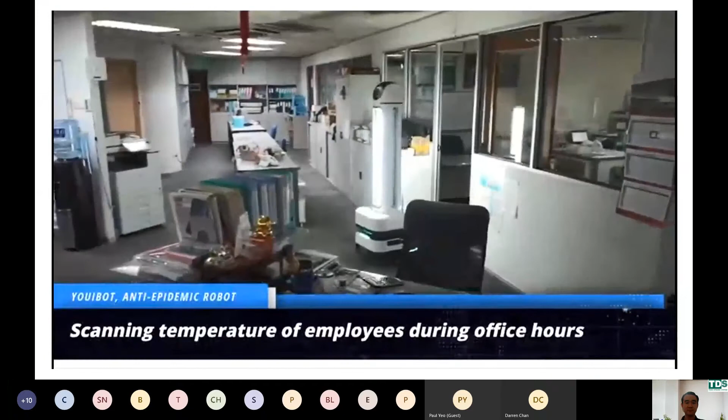Scanning temperature of employees during office hours. With 6 UV lamps and a UV power of 180 watts, Youibot does a 360 degree omnidirectional irradiation. Using shortwave UVC, Youibot is capable of destroying viruses, DNA and RNA in just minutes.

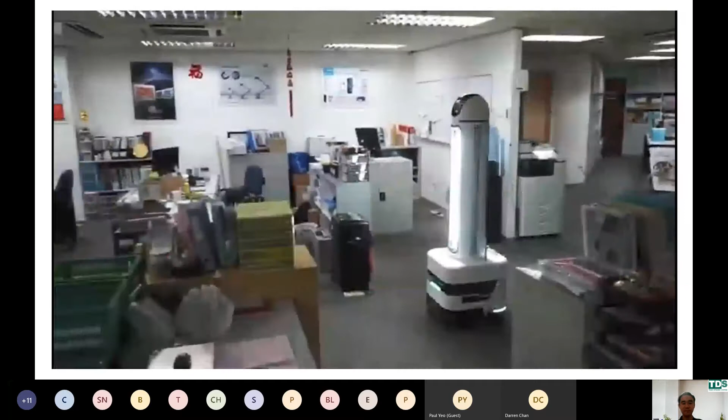Contact us for more information.

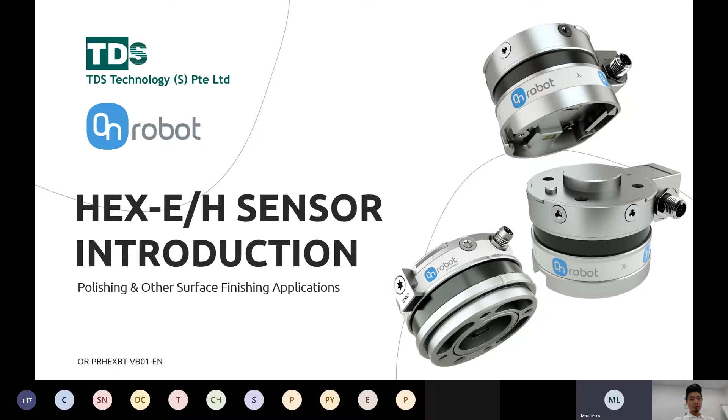So we will talk a little bit on our product, which is called the Hex E or the H. We have two versions of it, Hex E and H sensor. So what is the presentation content that we will cover today? I'll just talk one pager on OnRobot's vision, and after that, I'll go into understanding of the Hex force-torque sensor.

So as you've seen, this is a six-axis force-torque sensor, so it's called the Hex. I'll share some application videos as well, and I'll share with you a success story using our Hex sensor. And after that, we'll go for some Q&As, and after that, I will show a live demo on how easy it is to program the force-torque sensor on a UR robot, because I have a UR robot with me now. So okay, let's get started.

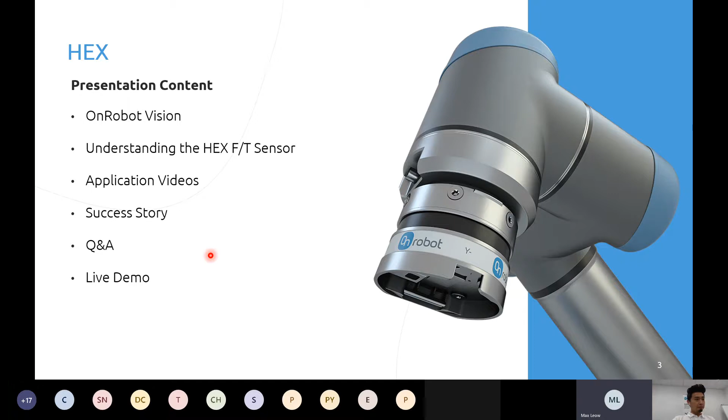So OnRobot vision. So what is OnRobot's vision about? It's all about building a one-stop shop for enabling collaborative applications. So we want to have an extensive range of products that actually cover all robots, all applications, all accessory types, and of course all industries.

So OnRobot will enable you to actually build a highly versatile robotic system. So OnRobot's vision, the main focus, is actually to be a one-stop shop for all of our customers out in the market.

So I'll move down towards the product itself, just to give you a short, brief introduction of the Hex sensor. Okay, so as you can see over here, we have actually two versions of the Hex sensors. The older version is called the Hex E or the H.

So we have two models for each version. And the newer version is actually called the Hex E and H QC. So what are the differences between the two? Specs wise is actually 100% the same. As you can see, the most obvious difference is actually the hardware.

So as you can see at the bottom, the Hex EH, the older version, is actually the original design which we have. It is lighter and shorter than the Hex QC version. So we have available robot kits as well, and it works together with a compute box - it's some sort like the brains of this particular sensor. And for the QC version, we call the QC actually stands for quick changer.

So we actually have an inbuilt quick changer at the bottom of the sensor, as you can see. So this is actually a manual quick changer, not an auto quick changer. So it can work together with any of our OnRobot grippers. For example, if you want to use a two-finger gripper, you can just click it on, and with just one cable connected to the compute box, you can actually start your programming. So it's really easy and quick to set up.

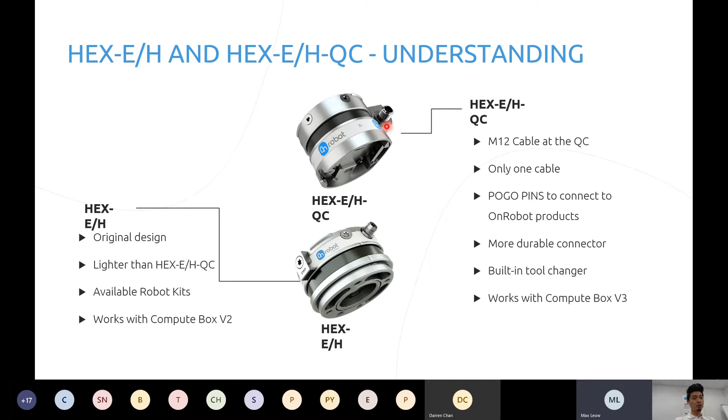So we also upgraded our connector size to be M12. It's bigger and more durable as well. Okay, so let's move on.

Okay, why do we need to use force-torque sensors? In layman terms, these few pictures will actually tell the whole story. I will not go too much in technical details, just a very brief layman explanation. As you can see on the picture on the left, for example, if I want to move this particular block, I want it to go into this hole. Can I do it without a force torque sensor? Yes, it's possible, but I have to teach the robot many positions to move it into this particular hole. But with a force torque sensor, I actually do not really need to program so many points to move it in.

All I need to do is actually set a constant force in whichever direction that I actually need. For this case, let's say we are talking about the Z direction, which is downwards. So the robot will actually make use of the force, which is controlled by the sensor itself. It will always press a consistent force downwards, and it will actually move towards the position we've set, and it will keep moving now until it senses, for example, a hole over here, and it will continue pressing this particular cube all the way down till it reaches the bottom. So the force torque sensor will always give a consistent force pushing it towards that direction that you actually set.

So in another example, as you can see at the bottom right corner here, we have a concave surface, for example. So as you can see, without a force torque sensor, if you want to move your own customized tool or something across this particular curve, and you want it to stick to it, it is not really easy. You actually need to create many robot waypoints so that it will actually follow the contour. But of course, with a force torque sensor, it's really easy, as you can just set a consistent force in a particular direction, and it will just follow the contour of it. So this is why a 6-axis force torque sensor is actually very good to use in the market.

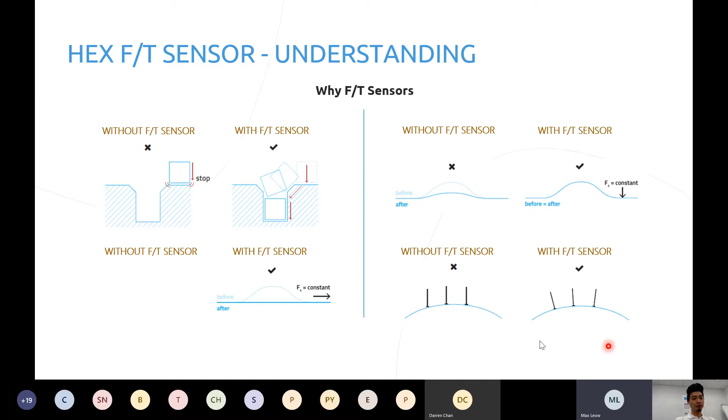The technology of the force torque sensors that we are using is actually optical. In the market, there are a few common kinds. We have the capacitive and we have the strain gauge. But for us at OnRobot, we are using optical. And if I'm not wrong, we are the only company using optical technology. So why optical? It's because it's more immune to EMF.

When you manipulate the sensor itself, the silicone will actually move when you use your hands or something else to manipulate the sensor. The light reflection will be different, and this in turn will send back a signal or some data to our compute box, and from there it will calculate and convert it into force and torque values. So this is actually the technology that we're using for force torque sensors.

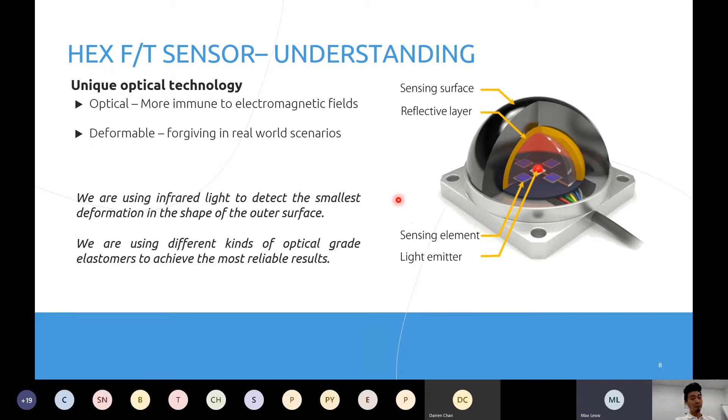So which force torque sensor to use? As I mentioned, we have 2 different models: the Hex E and the Hex H. Let's talk about the Hex E first. The Hex E is mostly used in assembly type applications, more for precise applications. It's always used when oscillation or payload is not an issue. So the Hex E is more precise and remains more accurate for a longer time than the Hex H.

Rule of thumb for your own tooling, if you want to use it: maximum payload of 3 kgs and 20 cm length. And for the Hex H, of course, it's the total opposite of the Hex E.

If you are using it on oscillating applications, for example turning tools, polishing, deburring, grinding, anything that can cause oscillation, it is better to use the Hex H. It's also good for heavier tools and fast movement. Why is it so? Because the Hex H silicon is actually harder than the Hex E.

So how do we categorize it? The E we call elastic, and the H we call hard. The Hex H can absorb more vibrations towards the sensor itself, that's why it's a harder silicon.

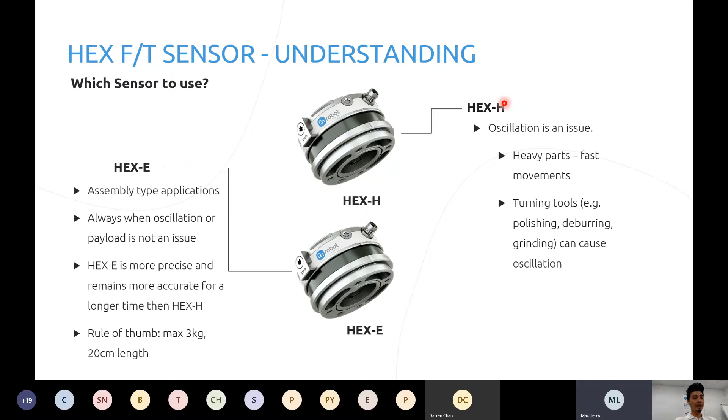So this is just some of the specs, the data of the hex sensor. I will not go into details, I'll just mention the key differences between the Hex E and the Hex H. For the nominal capacity, the forces for X, Y, and Z are up to 200 newtons. And for torque, XY is 10 Newton meters, and Z is 6.5 Newton meters, this is for the Hex E. For the Hex H, the forces are exactly the same compared to the E, but we have a higher torque value: XY is up to 20 Newton meters, and the Z axis is up to 13 Newton meters.

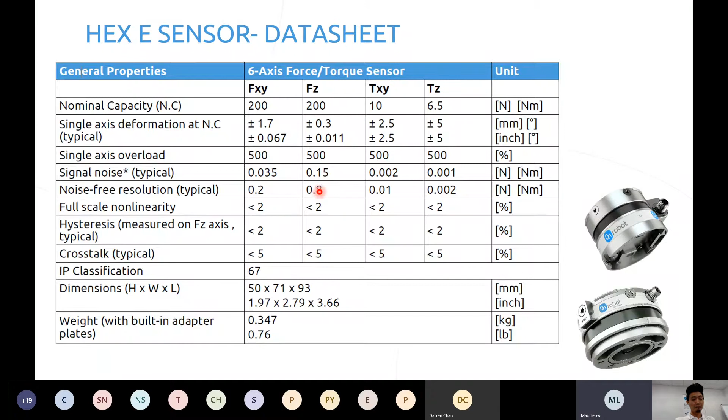Going back one slide, as I mentioned, the Hex E is more precise because the resolution is much smaller. For forces in X and Y it's 0.2, and for force Z it's 0.8. Compared to the Hex H, X and Y for force is 0.5, and Z is 1 Newton. So there's a slight difference in the specifications. If you're keen to know more, please feel free to approach TDS, or you can download the specs from our website.

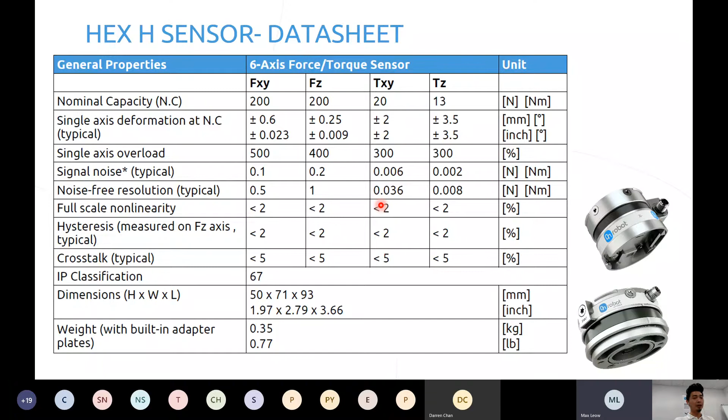So what kind of applications are good to use with this particular force torque sensor? Of course, like I mentioned, polishing, gluing, and welding. These are some of the applications that are possible to use.

Some of the benefits, of course, is really short programming time for complex paths. We have this path recording function. It is only to be used on UR and KUKA robots at this point of time. Later I'll show you what this path recording function is on the live demo itself.

Just a short explanation: I can actually use my hand to move the robot to whichever path I want it to go, and from there I can just play this path and the robot will follow that particular path which I have set it to.

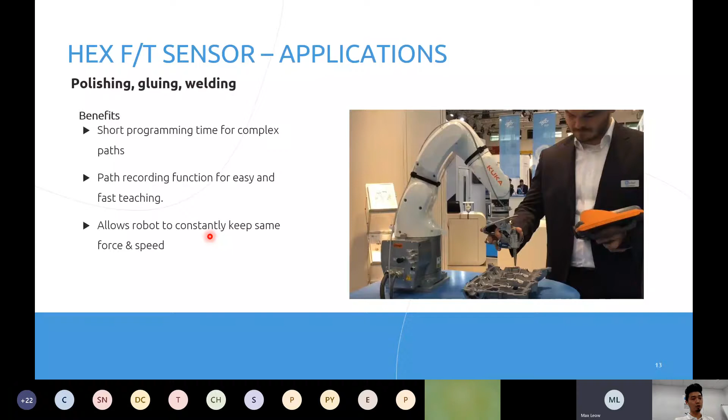The force torque sensor allows the robot to constantly keep a constant force and speed throughout your whole application. For deburring as well, you can make use of a force torque sensor. It reliably follows any kind of difficult contours, saving the time for all the complex programming needed. It allows the robot to constantly keep the same force and speed. That is what the force torque sensor is used for, along with short integration and easy programming, especially on the UR itself, because it's a collaborative robot.

And of course, for assembly, it is also possible. As you can see on the right side here, we combine our force torque sensor together with a 2-finger gripper to do an assembly in a PCB. We're actually inserting a ram into its position. We can set a pushing force, for example, so the insertion is automatically corrected. You don't have to teach the robot to push the ram into its slot and lock it in. The force sensor itself will actually do all the work for you.

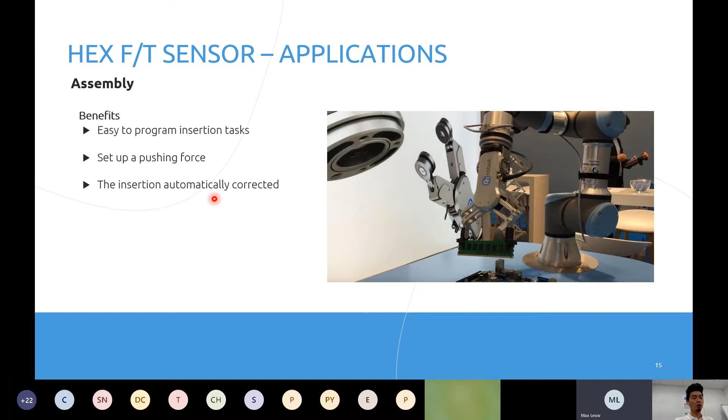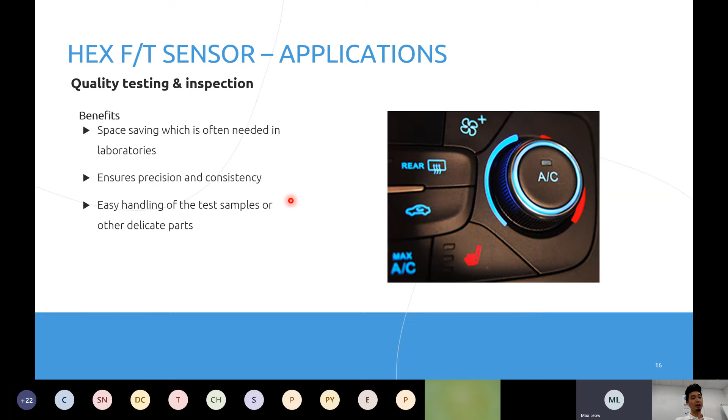And of course, lastly, you can also do it for quality testing and inspection as well. Some of the examples is like you can actually do testing of a push button, one of the quality testing. Another thing is you can do testing on, if you have for the car, the signal or the wipers, the shift stick. So you can use that to test the shifting of the sticks as well, how good is the tension of it. These are just some of the examples that you can make use of in quality testing and inspection.

Okay, I'll share with you some polishing application videos. One of them is demo only, and the other is an actual application which was already being used in China. Let me play this. There's no sound, no talking inside, but there's just some sound. Let me do a short explanation.

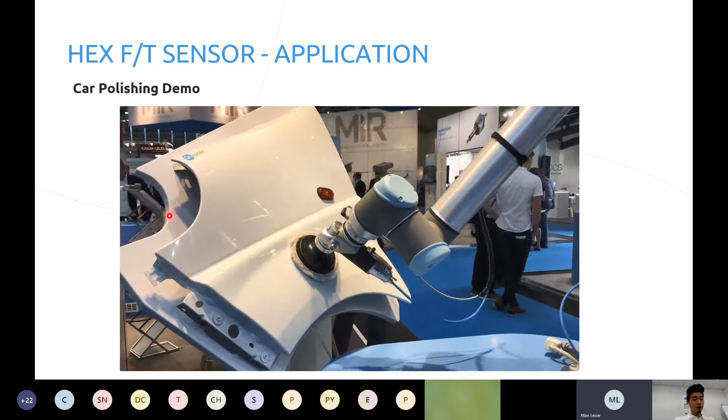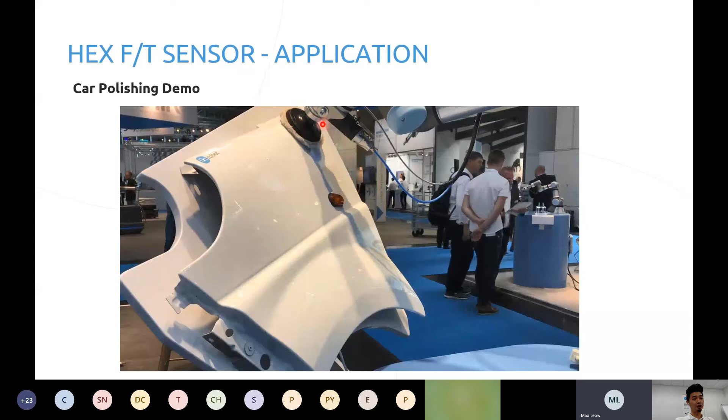As you can see, we're doing polishing of a car door. It's not flat, it's curved, and there's a lot of contours on the car door. So what we do is use the force torque sensor to create a consistent force in the Z-axis, so that you always press down with a consistent force following the contour of the car. On the UI, it's really easy to make use of this particular function. You can see it's just moving around, following the contours, the curves, without separating the tool from the car body itself.

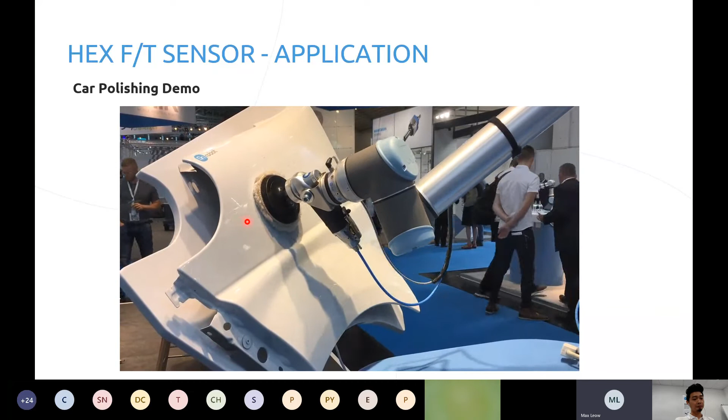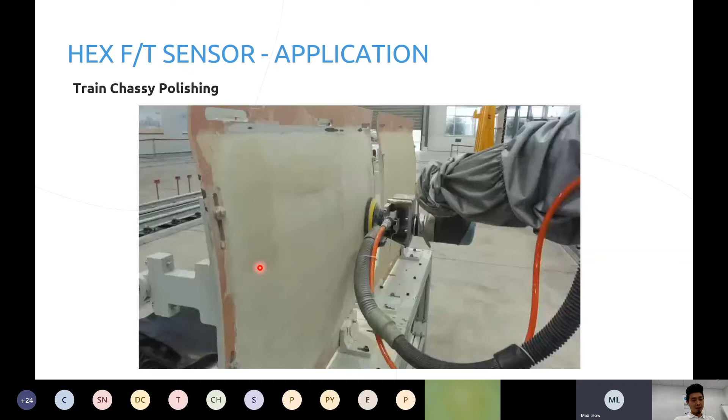Okay, and the next one, this is an actual application in China. It's a train chassis polishing, or I think it should be sanding if I'm not wrong. Let me play the video for you. It's pretty much similar to what we saw previously. This is just to show you that this is an actual application that's being used with our force torque sensor. As you can see, the train chassis is all curved, so they're using a consistent Z force in this Z direction to press down and do the polishing.

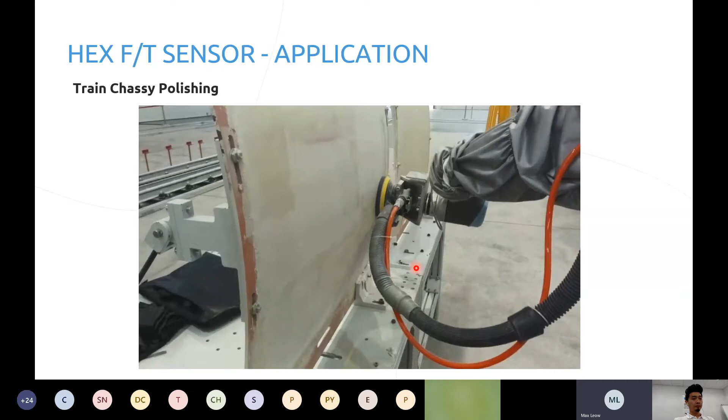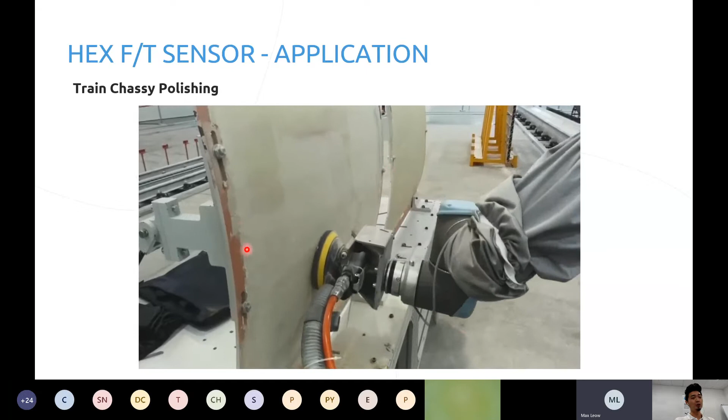All this motion here, you can actually make use of our path recording function on the UR. So you don't have to teach waypoints after waypoints after waypoints. You can just make use of the path recording and make the path go to whichever direction that you actually want.

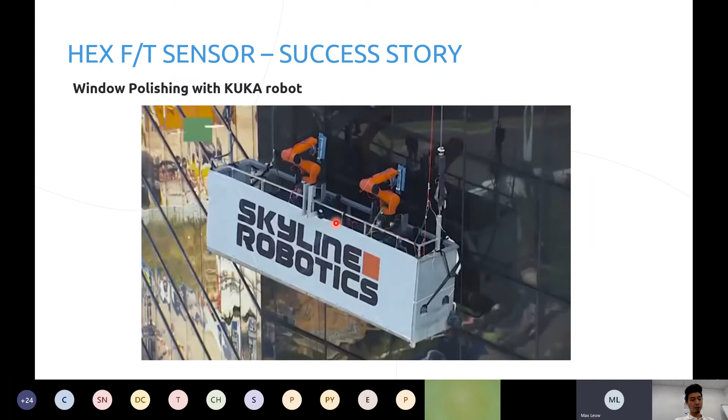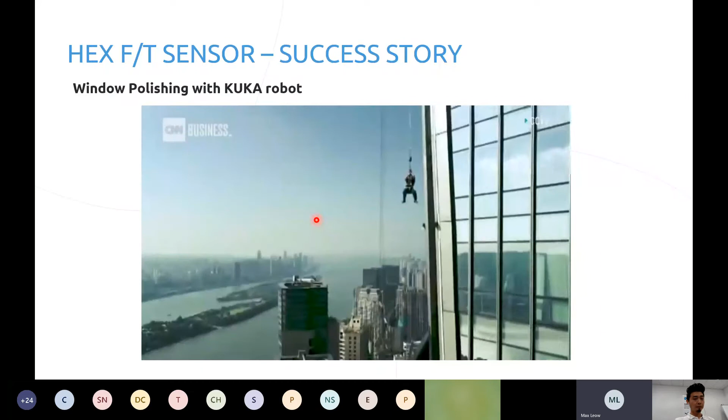We believe that robots should be put to work as service operators, and the first place to start is where people are hanging hundreds of feet in the air. Skyline Robotics, we have a robot that cleans windows.

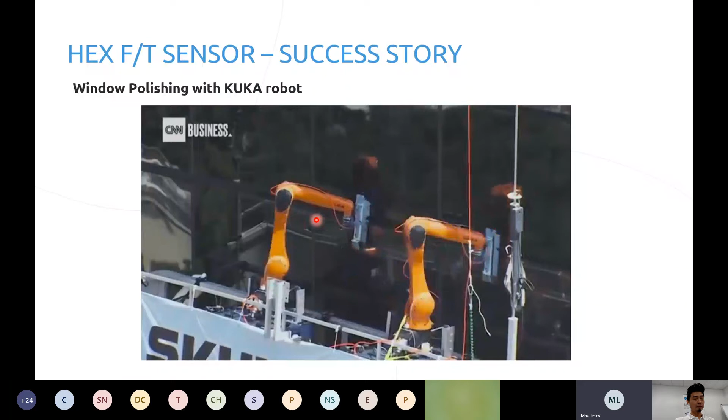If we look at a 40-floor building that has roughly 300,000 square feet of window surface to be cleaned, it would take standard work today roughly 2.5 months of actual work to clean. With Ozmo and just two supervisors, we can do that same work in about a week.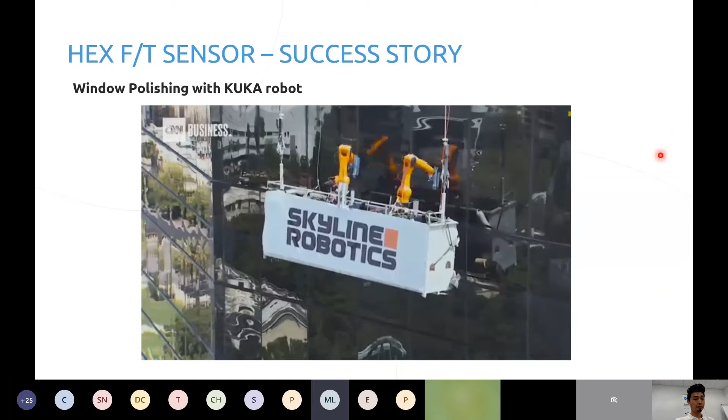The robot actually maps the building in 3D as it approaches. Every obstacle it might encounter, like a head popping out the window or a window opening, the robot will self-correct and move around it so as not to break a window. How does it know if somebody's sticking their head out? Well, it has computer vision and touch sensors, so it can see and feel the building.

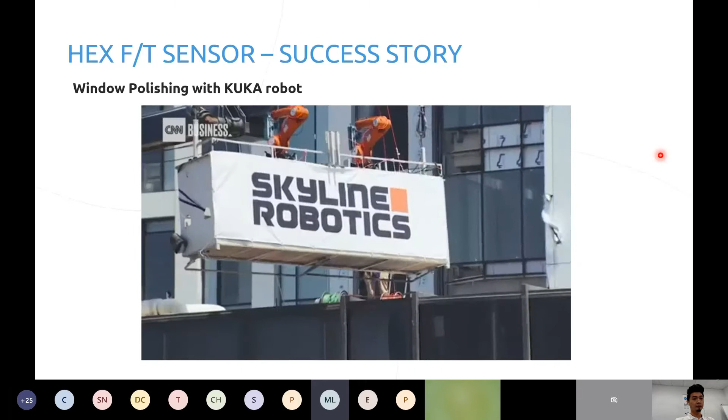I think the first thing people think of when they see this type of system is automation is coming for our jobs. This probably seems like the perfect example of that. People who probably don't make high wages cleaning these buildings are going to be replaced by this robot.

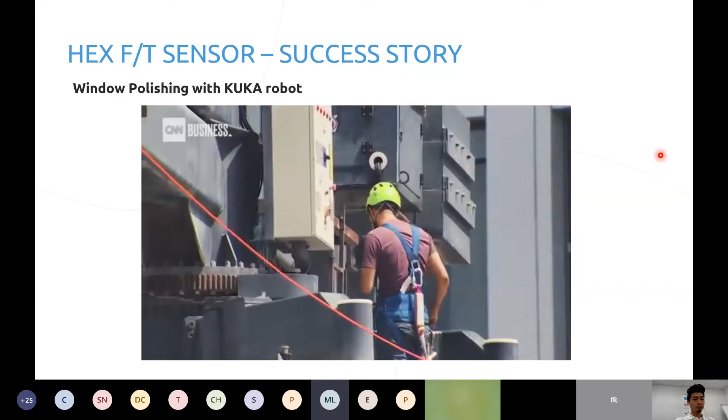I think eventually society, mankind, will be replacing dangerous jobs because it doesn't make sense for people to be risking their lives. From where we stand, when we look at the job we are automating, it makes perfect sense for us to put the person in a safe position, supervising the robots, and let the robots dangle hundreds of feet in the air.

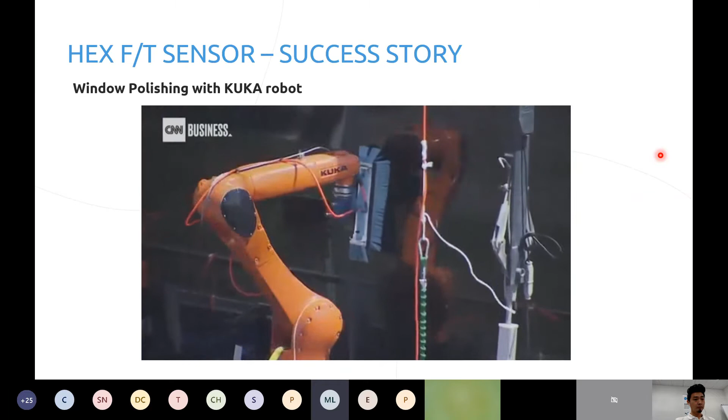Okay, so I hope you like that success story that we have. That's the end of my presentation.

Before I go into the live demo on how easy it is to actually set up a surface finishing application, I will take any questions if you guys have any.

Okay, thank you. Give me a second. Let me stop sharing so I have a bigger video. Let me just shift my camera to the robot side. Give me a second. Okay, sorry, so just check—can you all see the robot and the black color part over here? Okay, can everyone see? Hi guys, can you all see?

Okay, okay, great. Let me just show you how to do this. I will do the programming live, just to prove the point that it's actually really easy to do.

So what I actually do is I have this particular tool over here, which is just a simulation of a polishing tool, for example. What I have here is this wavy piece of block. I'll make use of the sensor, which will keep pressing down with a consistent force, and it will follow the contour over here.

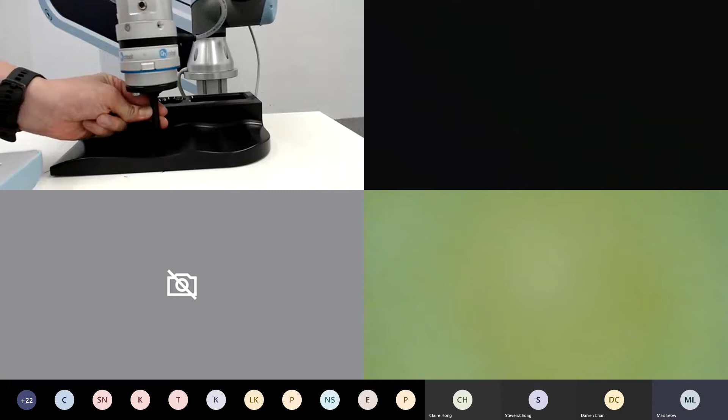Okay, so now I will use path recording, which I mentioned. What I'll do is set the path over here. I'll just hand-move the robot, as you can see, using my hand to push, and I'm not even touching the surface of this particular block.

Once that is done, I'll stop, and I can move it back to my starting point, and do a path replay. This is not the actual running yet, just to check whether your path is correct. That's done—I'll save it, and that's it. My programming is done. Let me just play the program, and you guys can actually see how it looks.

Hope you can see how it actually looks. Okay, so as you can see, it's actually following the contour of the curvy surface, which I've mentioned.

So I'll do another short simulation. As you can see, if I were to push up the thing, the robot will actually keep pushing a force downwards.

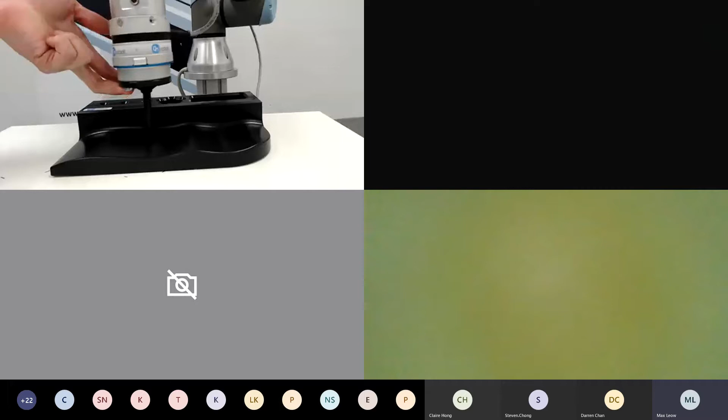Okay, so this is what the force torque sensor can actually do—it will always keep pushing down. No matter how much I push it up, it will still go downwards to that force which I actually set.

Okay, so let me just show you how short this particular program is. Can you all see the programming screen? As you can see, it's only a few lines—1, 2, 3, 4, 5. It's just five lines, and I can do what looks like a complicated program.

It is really easy. I just need one waypoint, which is the starting point, and I just need to zero the sensor, and all the work is done from this force torque control. As you can see over here, in this force torque control, I can set different axes of the force which I want to use. For example, in this particular case, I'm using the Z direction, so I just set a force of 10 newtons, for example, in the Z direction.

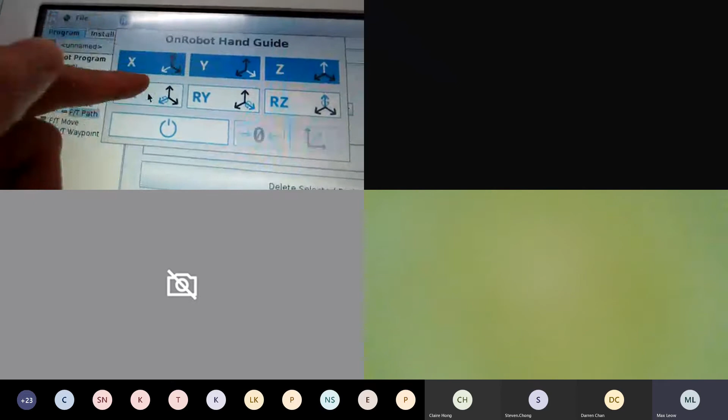And the job will be automatically done by the force torque sensor. I also have this particular thing called the FT path, which you can see in the toolbar. I can use my hands to control all 6 axes of the robot using this path recording, and I can disable whichever axis I don't need. One axis only is also possible.

I think my time is almost up, so this is the end of my presentation. I hope you guys have a much better understanding of force torque sensors and why it's important to use them in some applications. If you have any questions, let's take it on in the Q&A session. So Max, hand over to you.

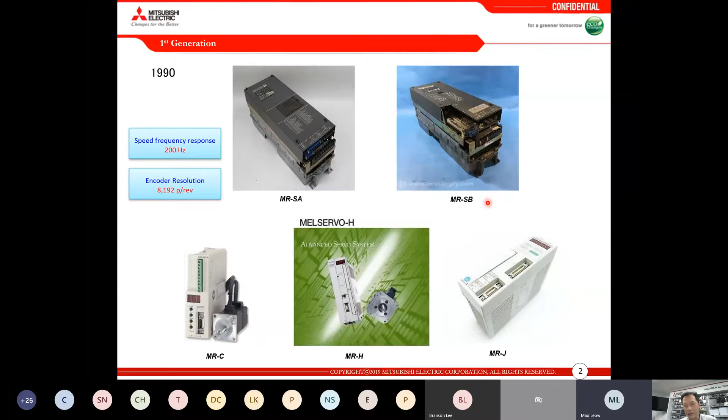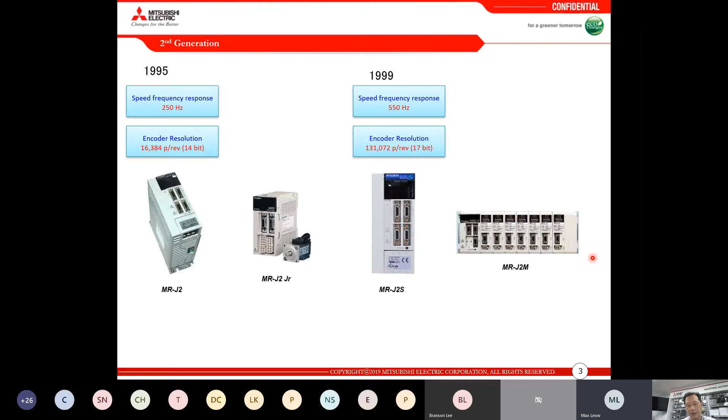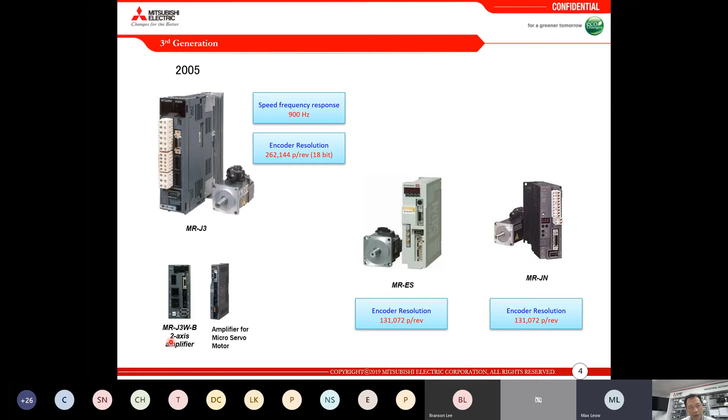Okay, after that we move on to the third generation, around 2005. As you can see, the speed frequency goes up much faster to 900 hertz, and the encoder becomes 18-bit. At the same time frame, the same generation, we also have some sub-series: the MRES, with a 17-bit encoder, and the MRJN, the smaller series, also with a 17-bit encoder. On top of that, we also have a 2-in-1 servo amplifier and a micro servo amplifier.

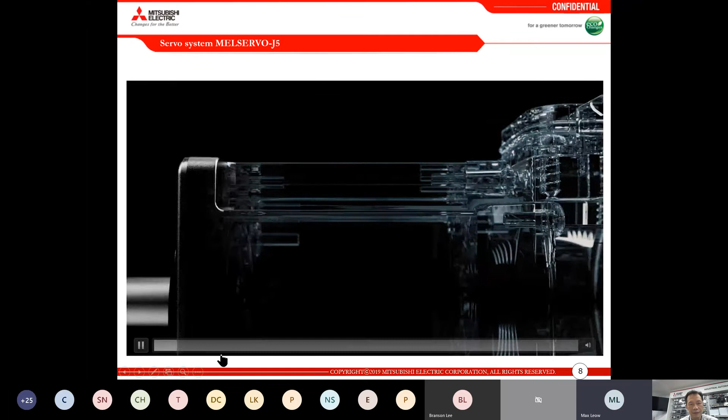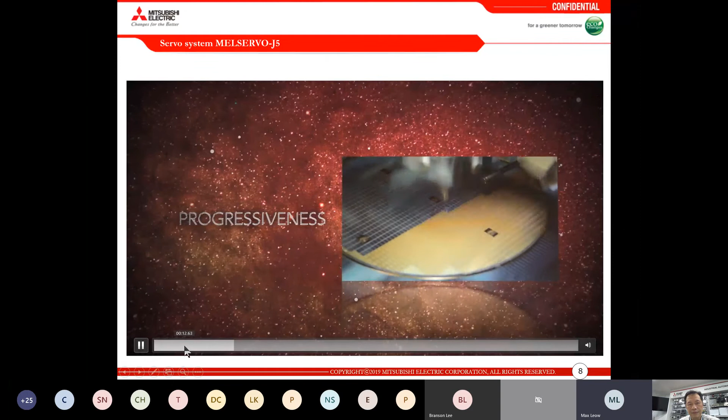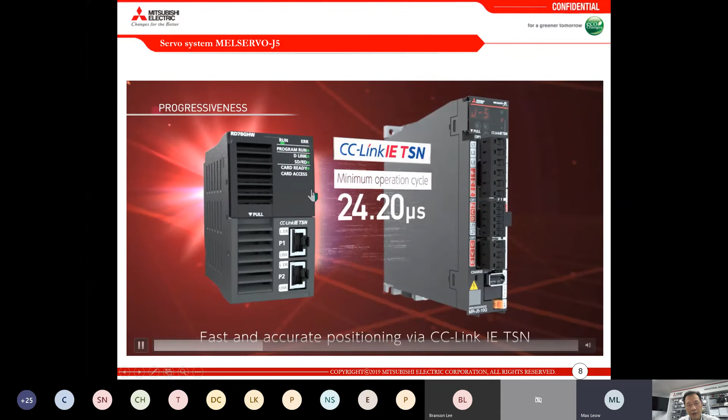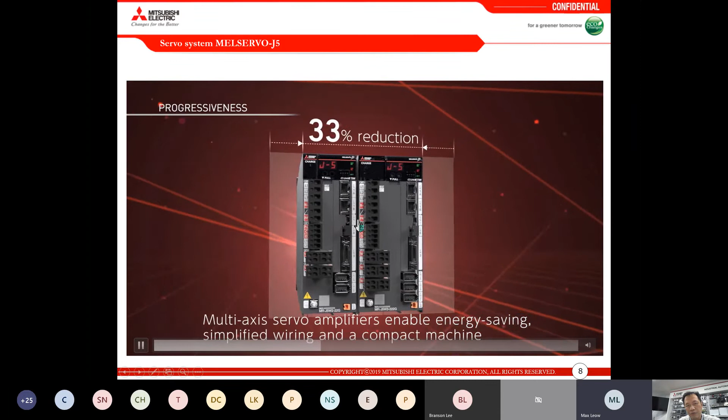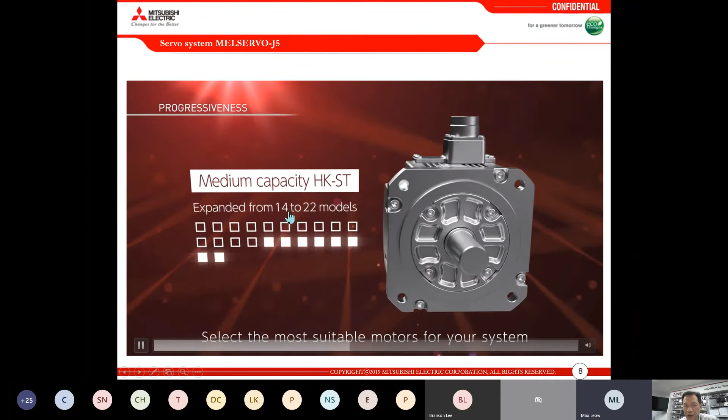This is the lineup compared to J4. So everything has increased: more models and higher capacity. So your sizing up of the machines becomes much more right.

And this part, this is what's coming up in the future. We are going to launch a motion software. That means you can install the motion software whereby the software itself will use the RJ45 in your PC to convert it to TSN, and then you can control the servo with just a normal desktop PC or industrial PC.

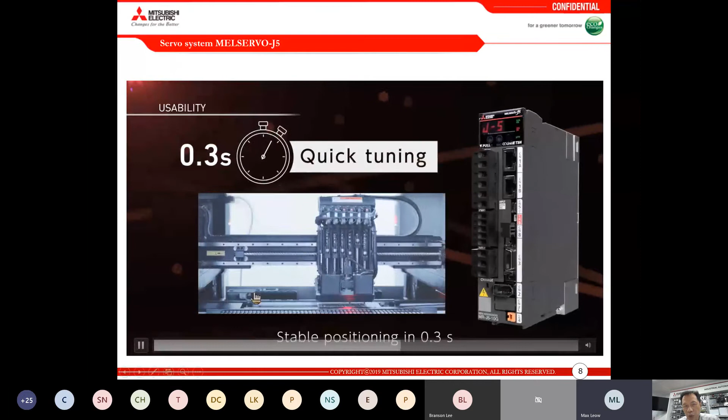Okay, this is a new feature. Quick, right? And this series is all battery-less, no battery.

Yeah, this part is about the machine diagnostic functions. This is the unique part of the entire J5, because there is an embedded AI inside the servo drive. Okay, later I will discuss this in further detail.

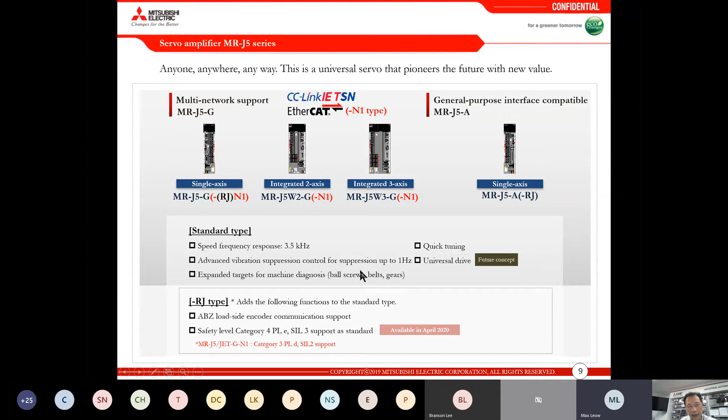This is the highest so far in the industry, 3.5 kilohertz. Okay, then next, as I mentioned just now, the new feature of this series is the quick tuning. Quick tuning only takes 0.3 seconds when you power on; 0.2 seconds to settle. It gives you a reasonable tuning gain response towards the command. This dotted line is the command.

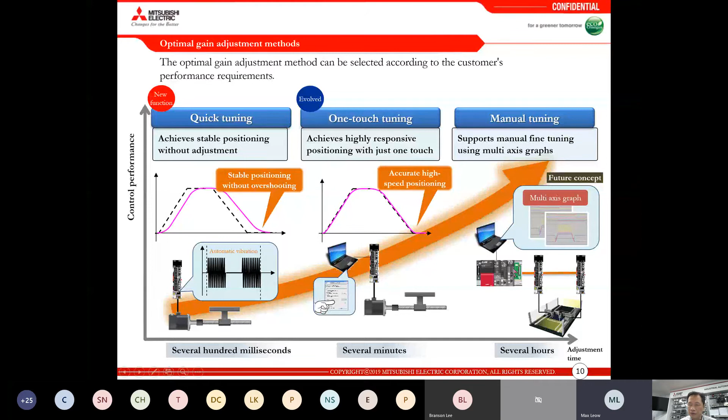And for those difficult applications such as gantry-based systems or something, you may want to use manual tuning. This again allows you to do multiple axis tuning together.

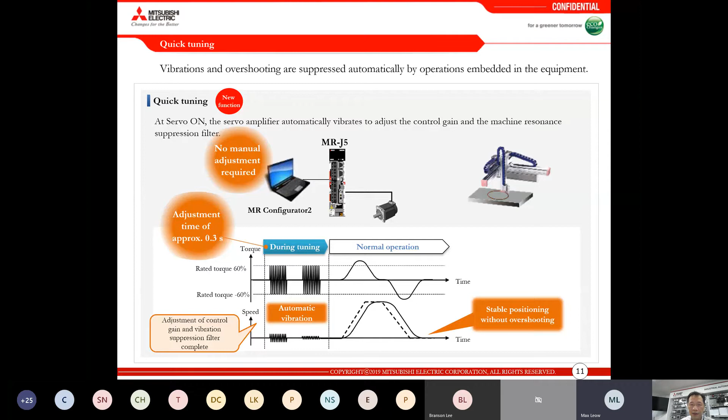For quick tuning, this is the one I mentioned just now. So once powered on, just 0.3 seconds, everything is automatic. You don't need to run towards a certain speed in order to detect the right gain. Everything is automatic in 0.3 seconds once you power on. And as compared to one-touch tuning, you see J4 and J5.

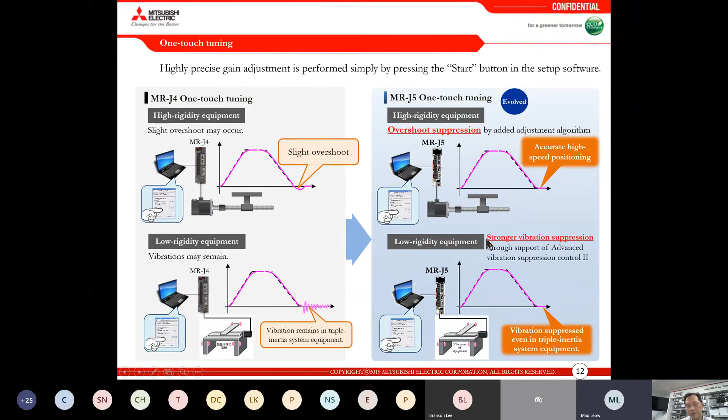You can see that J4 and J5, this one is still slightly overshoot, and maybe some oscillations here. For those low rigid machines, these are 3-mass systems, meaning the joint and end effector side may have some vibrations. All these can be filtered from the servo. So at that time J4 may still overshoot, undershoot a little, or oscillate, but J5 is further improved—it's getting even more perfect right now. Also, J5's size is again reduced, smaller, same as J4. J5 also has 2-in-1 and 3-in-1 options, giving you very good space reduction for the control panel.

Same for the motor—as you can see, the length is getting shorter compared to our previous generation motors. And there are more and more sizes available.

Next, I want to introduce the most important development for J5, which is embedded AI. With this embedded AI, we are using Maisart—Mitsubishi Electric AI creates the state of the art in technology. If you want to find out more about Maisart, you can go to this website. It will tell you Maisart is not just used in Mitsubishi FA products and robots, but also in our aircon, automotive components—we make car component devices, airbag systems, power window or starter systems, elevators, satellites, and many more things. They all have a lot of embedded intelligence inside.

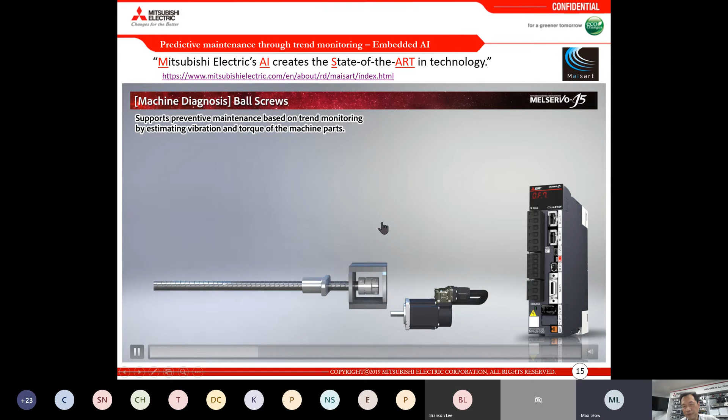Imagine a very big handphone maker in China or a similar factory—the factory size may have 1,000 machines under the same roof from beginning to end of the line. You'd probably have to walk a kilometer, with hundreds and hundreds of machines, many mechanical parts like ball screws, belts, or gears, running 24 hours a day, 7 days non-stop. So you can expect that the servo and mechanical parts are wear-and-tear items—everything has a lifetime. Without pre-notification before a ball screw fails, there will be a lot of unscheduled downtime. So we want to eliminate that.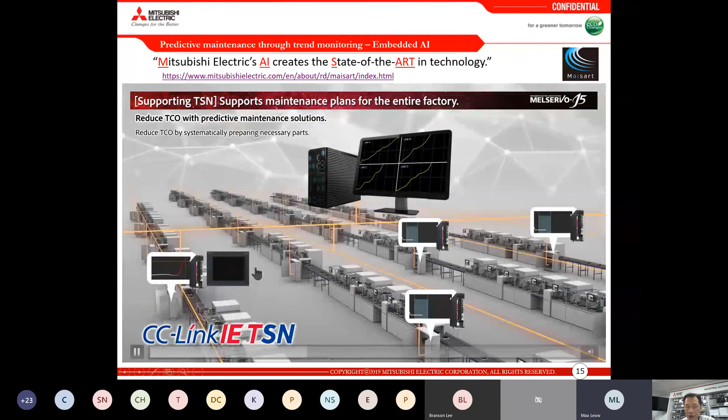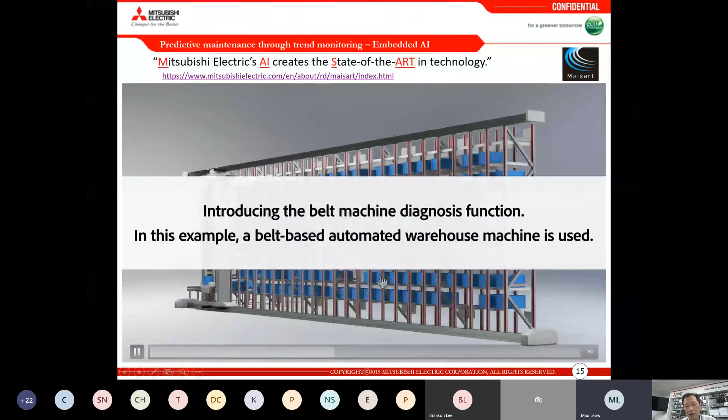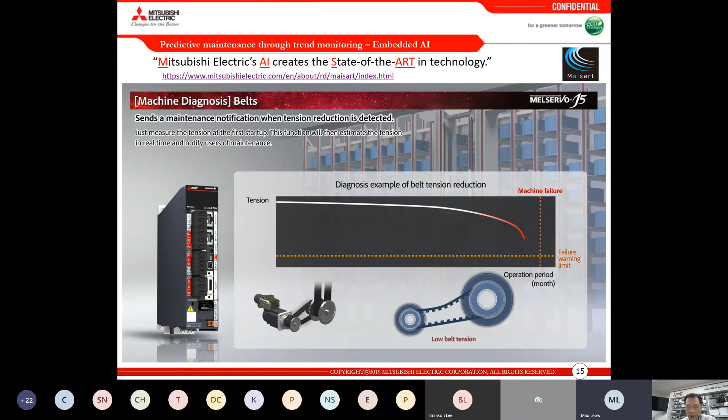In this case, it's tension. Without measuring tension, again, it's the same thing—they use dynamic frictions and the encoder's parameters to detect the belt condition. This is the Maisart for the belt.

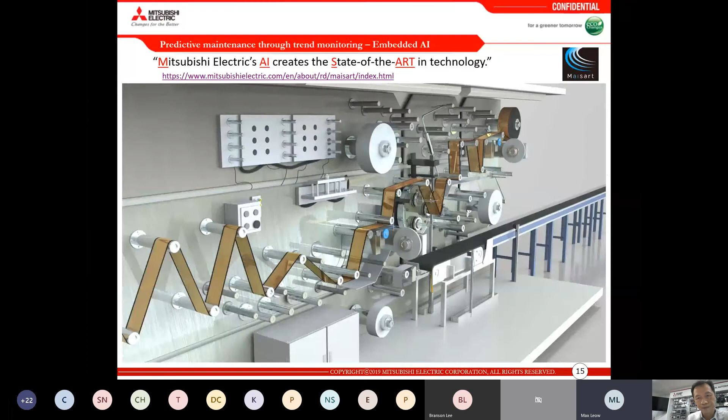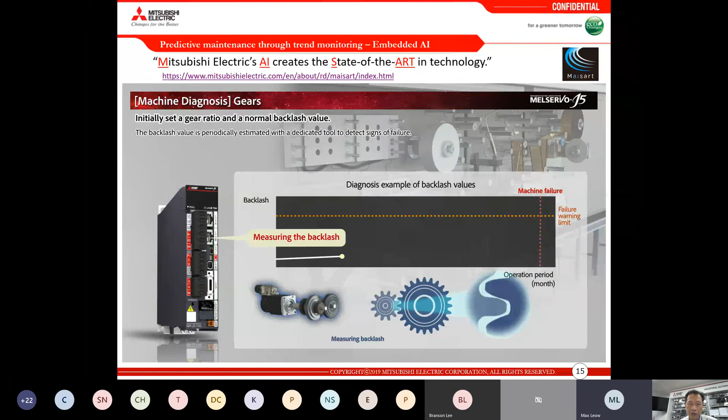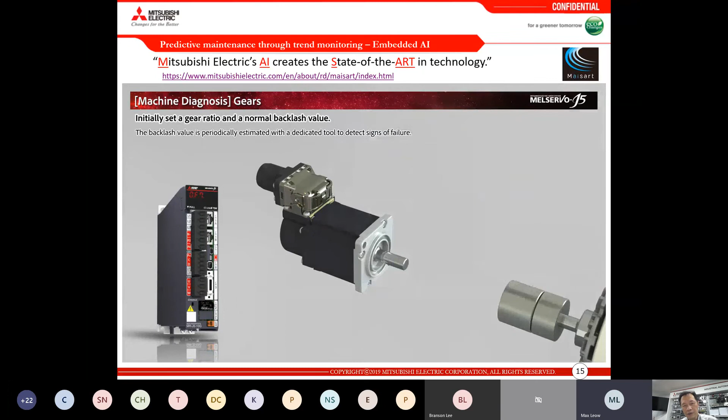The final one is the gear. The gear ratio is probably the only thing involved. In this case, if we rotate from there... these are the three diagnoses.

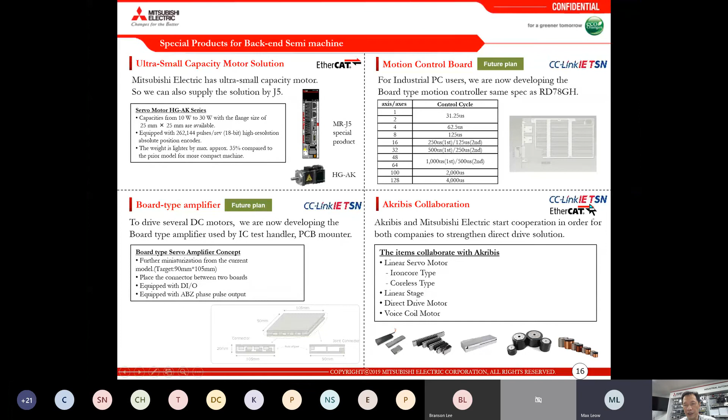For motion, we have a motion board, as I mentioned just now, and we have CC-Link IE TSN in the roadmap—once we launch it, we will update you. There are performance differences with a board or without one. We also launched software so you don't need any motion board to control the servo motor, but the performance is different. For maximum control cycle, you will need the board; without it, the control cycle will be longer, but the number of axes is still very big. Board type amplifiers are usually for DC servo mini size at the mounter area. In Singapore, we also have Akribis collaborations where ironless, iron-core, and coreless type linear motors and DD motors, and also voice coils, are able to connect with Mitsubishi servo drivers. This comes with two choices—CC-Link IE TSN and EtherCAT—both able to control.